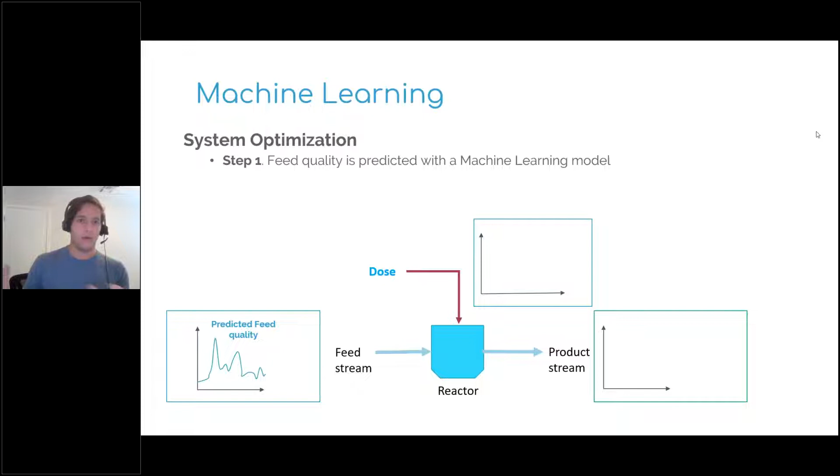So the first step of the process is training models to generate good demand models or water quality models. From there, we can recommend control actions for pumps, distributions, recycle rates, blowers, compressors, even something such as odor control within a system based on what's required on specific inputs.

We do this by looking at historical data and saying, okay, what specific set points resulted on a very particular product stream, whether that be an output in a discharge or drinking water.

Based off very specific rules, such as compliance limits or specific operational targets like cost targets, we have several iterations at work, sometimes tiered statistical analysis or sometimes numerical models such as our hydraulic calculations, creating thousands of iterations to determine what different types of approaches can we take to result in a very specific product stream to meet the predicted demand.

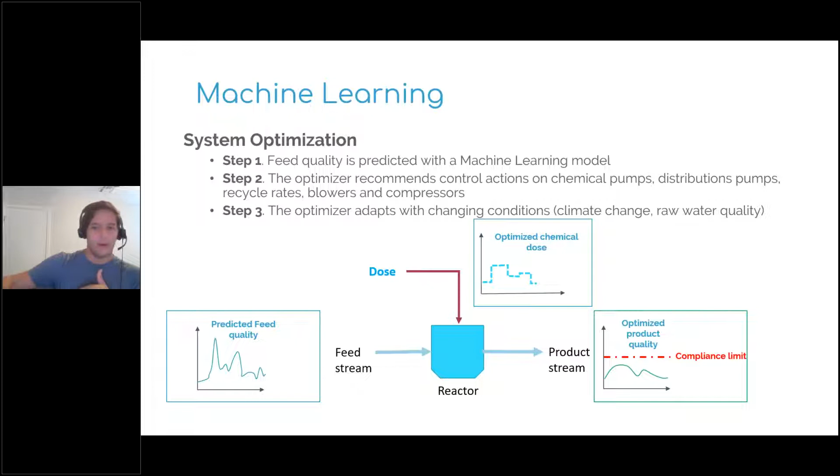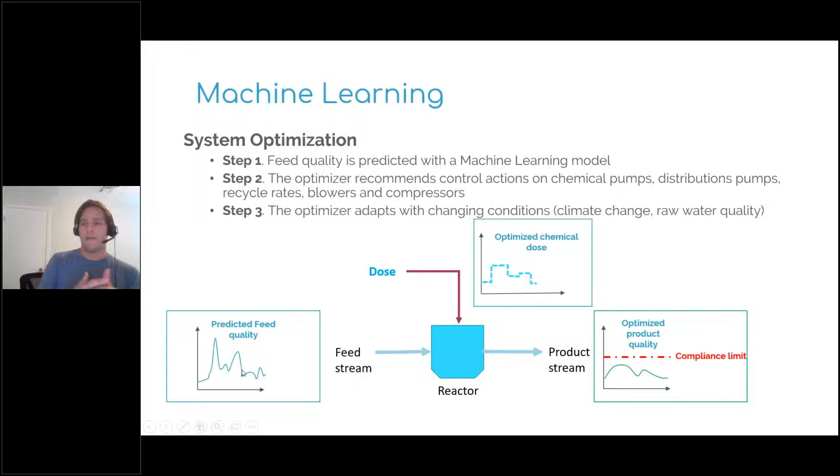Based on those iterations, we can output very specific control actions for a system. We can do it on a 24-hour scale, a 1-hour scale, or react to something that's going to happen in 4 hours. It really depends on what you're looking to predict and how far you're forecasting your data out.

So getting right into some of the places where all this technology is applicable. I'd like to stop here after each one of these to see where we can get more questions answered. So Tim, you'll have to interrupt me right after I finish here on water treatment, which is where I'm going to start.

You don't want to do a question first here? Oh yeah, if there's a question, definitely. I'm popping on because there's a question from David: before you get into the use cases, what threats and issues does using AI present for cybersecurity?

Well, that's a very good question. It really depends, but network architecture is really going to be the prevailing science behind determining the threats that AI brings to this. At the end of the day, AI can only do what you tell it to do. It's not going to go beyond bounds or limits because the models are constrained by things like compliance limits.

It's not going to, let's say, overdose on a chemical if you already have a max chemical limit that it will ever give. So in that regard, AI isn't the threat. In data security, there's always that threat. There's no system that's perfect.

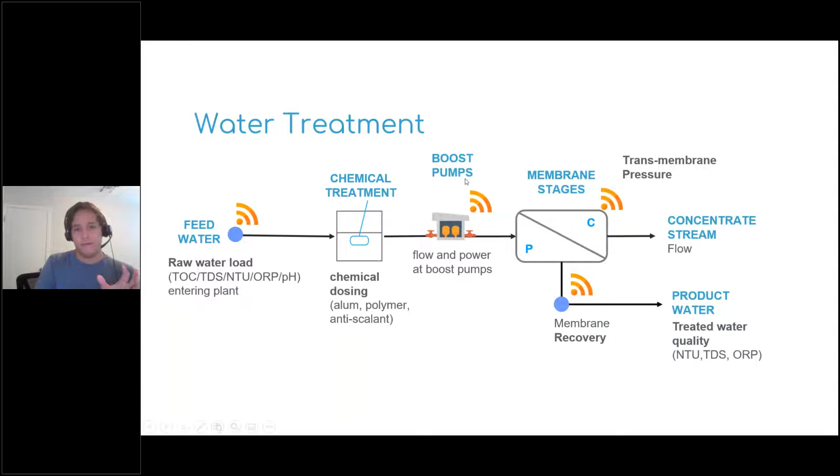In particular, for this kind of - actually I'm just going to go ahead and use this. Come over here. So one of our traditional approaches with one of our customers over on the East Coast was to forecast, as I mentioned, and I'm going to reference back that strategy we use to forecast out water quality. We're going to look at data quality, not just those real-time data sensors at 15-minute resolutions, but also the lab data.

That's very important because, as many of us may be aware, there is a lot of noise in sensors, or sometimes sensors can't be as reliable as we'd wish them to be. Other times our staff gets very stretched thin. I haven't worked in a utility in about 2 years, but still, staff can be spread thin, which can cause a sensor to require calibration and maybe slip through the cracks, and that sensor doesn't become that reliable. So it's very important that in the process of reviewing all this data at 15-minute resolution, we're also comparing it against the lab data.

What we do there, and what we allow these machine models to do, is we allow them to understand how they're correlated, the margin of error between the two, and also validate each other's data. So if a sensor is going off the rails maybe, and you don't have good sensor health, and someone in the lab comes back and adds that lab sample data, validating that data source, you can get that alarm or alert that says, hey, this is off. In the meantime, since this sensor may not be calibrated correctly, it can infer the right water quality parameter to forecast out what you'd expect to see within a very specific day.

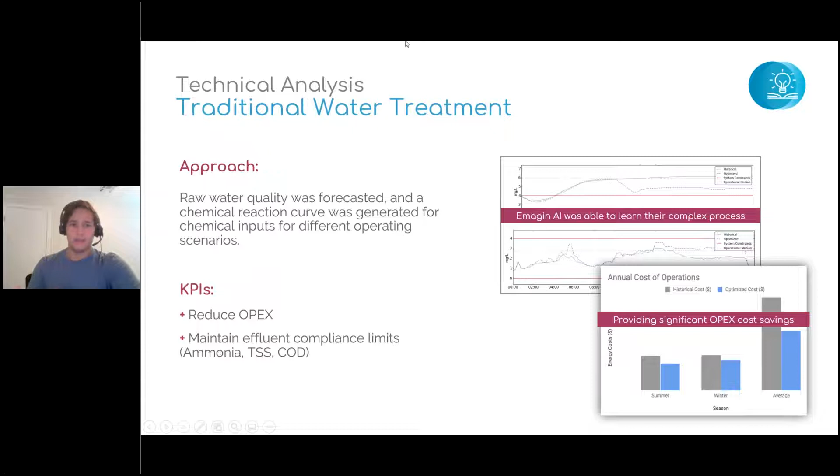In that particular case, it started recommending control actions to reduce specific dosing, eliminate the need for too much lime addition, and of course ferric and polymers. This is just an example of some of the reports spit out by Emagin, which is our artificial intelligence that sits within the platform, and some of the savings realized in utilizing this outcome-based approach or this OPM approach. So this kind of just goes back into repeating a little bit of what I just mentioned.

We actively monitor the status of that raw water quality, because that's the most important part of building these machine learning models—understanding what cluster, what operating scenario we lie in. Once the machine understands, hey, this is the operating scenario I've been in the past, and this is the numerical relationships associated with today's approach, we can then track those key metrics, those outcomes, which are normally put in place by a planning engineer or a process engineer.

And allow the system to use a machine learning model that's both penalizing for any out-of-compliance recommendation and giving rewards for all the specific KPIs listed. So this is a reward-penalization model where for every dollar saved, if a KPI or an outcome or objective is listed as 'save me money' and you have a fixed rate—like water loss, don't lose, save me as much money as possible—the system is going to look for that reward, and it's going to get a reward for every dollar that it's saving.

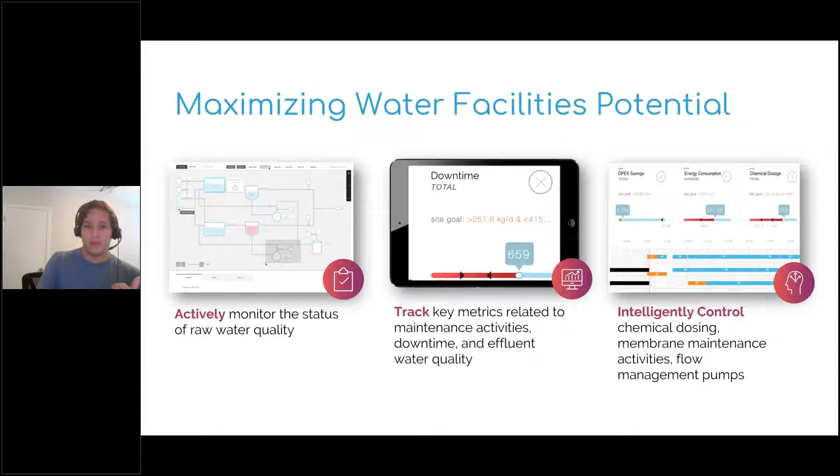Very, very useful. I'm going to stop right there. Are there any questions right now, Tim?

Yeah, a couple came in. One: how are AI models different from just a traditional SCADA system, would you say? Kind of what you're describing here with Emagin—how's that different from SCADA?

Yeah, so the SCADA system is a system of alerts and it's just a display module, right? AI is solving for a problem. And I'm using the term AI, but really at the end of the day, it's a type of artificial intelligence—a machine learning model.

With SCADA, you analyze, right? Or your operators analyze. You go to your control room, you take a look at what's going on the screens, and then based off what you see, you pick a control action.

ML does all of that on your behalf, but also solves and iterates various solutions by simulating different processes before recommending an action, right? So it's similar to having an operator say, 'Hey, it looks like we have high turbidity, let's adjust our dosing over here, let's increase our ferric dosing.' They go and increase the ferric dosing and they wait for it and they look at the outcome and they keep adjusting until it gives them the results. The big difference with machine learning models is it goes through those iterations for you on your behalf—it simulates that on your behalf and gives you an answer straight up.

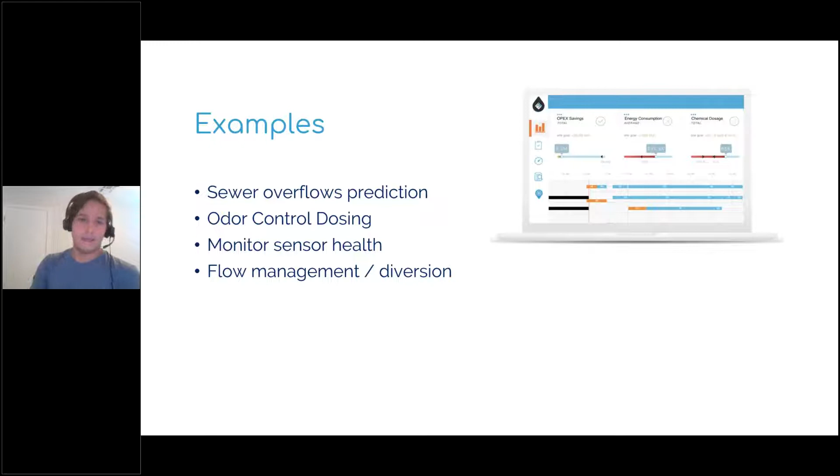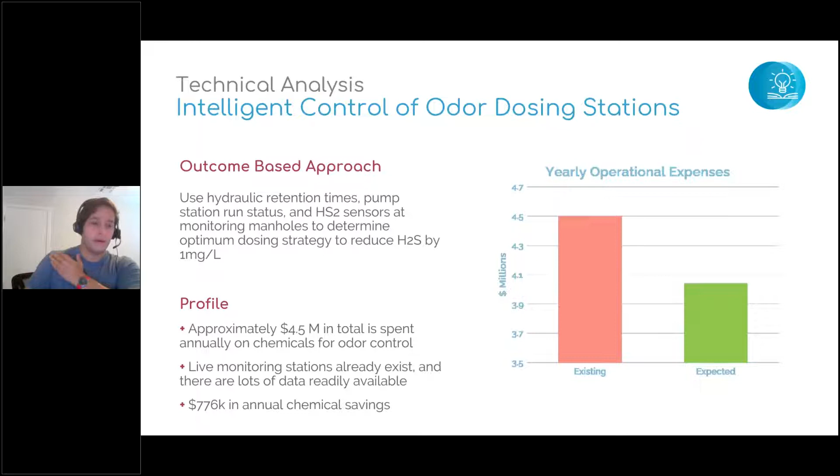Coming back to that H2S example, the total spent for a year just on odor control was $4.5 million along several trunk lines in the large metroplex area. The data was all there to be able to reduce costs. We simulated the costs and historical models reduced by 1 milligram per liter, and we're in the process of implementing that now. We expect up to $776,000 in savings by allowing the system to simulate and work through those issues.

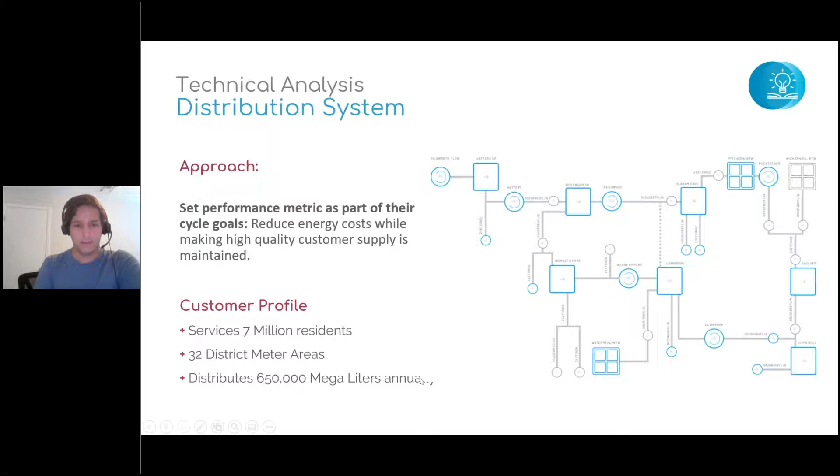Now distribution — for those who may have missed our last water talks a week or two ago, this is a brief sample of how that data and these machine learning models were used at this utility: 7 million residents, 32 district meter areas, roughly equivalent to a pressure zone but not always — a DMA doesn't necessarily have different pressures, just isolated areas — distributing 650,000 megaliters annually.

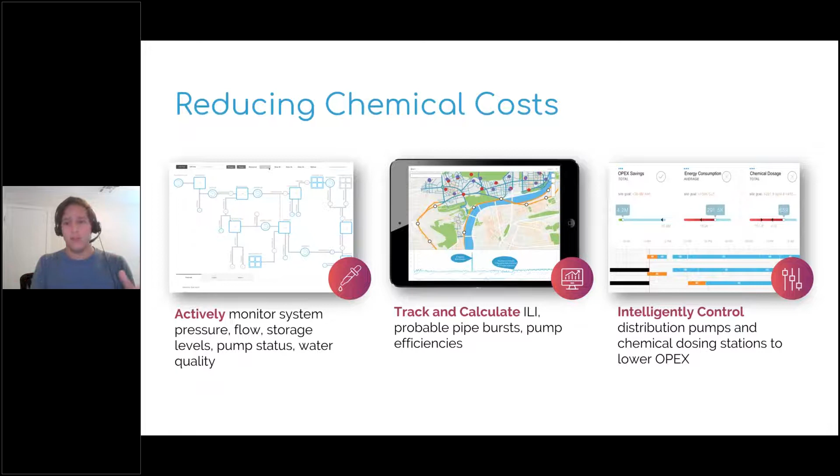Again, we follow that process: monitor all the live data, validate it using historical data, and sometimes not just historical data but the hydraulic model itself. If you don't have those DMAs available, you might be stuck needing to generate a virtual DMA — a virtual segment of your model — to give the machine knowledge of where the boundaries end within a specific system.

With this particular client, same system, same operational scenario, we push out recommendations on the optimum level for a storage tank, elevated or ground, what time of day the high service pumps should operate to keep those levels steady, and how that compares to our tariff rate or energy rate structure — optimizing pump timing and maximizing storage in the system to save money and energy overall.

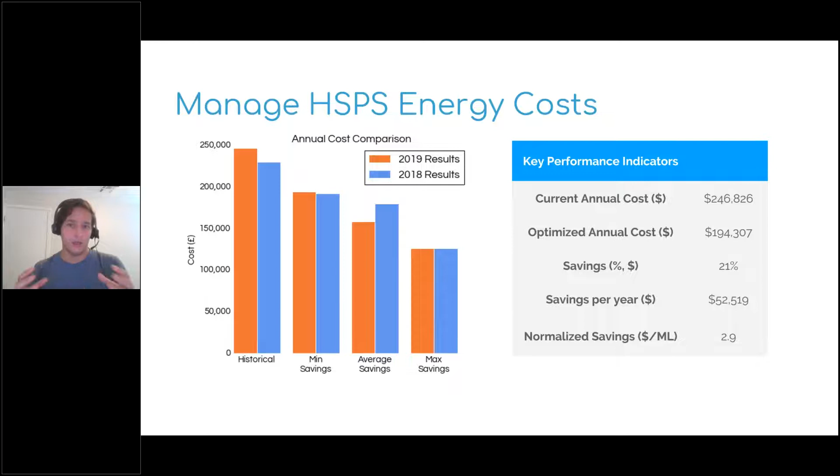Wastewater treatment, and then I'll stop. So in this particular case, we have a wastewater treatment plant, very similar concept, 17.6 MGD, right?

4 parallel treatment trains. In systems where we have trains, we have an even easier time validating some of those model results. We can isolate a model or a recommendation to a very specific train and use the data from that process to feed other trains. It's the same way we can use data from all the implementations to help these models further understand the numerical or biological relationships being experienced in different types of processes.

Conventional activated sludge treatment is a pretty well-known science, at least that process. But as our limits get stricter, a lot of people are starting to look to more advanced or BNR systems, enhanced nutrient removal systems, whether that's shifting over to a modified Bardenpho or MLE process—all of that alluding to segmenting your reactors such that only portions get oxygen, so you can have anoxic zones available to get biological phosphorus removal or anything of the sort.

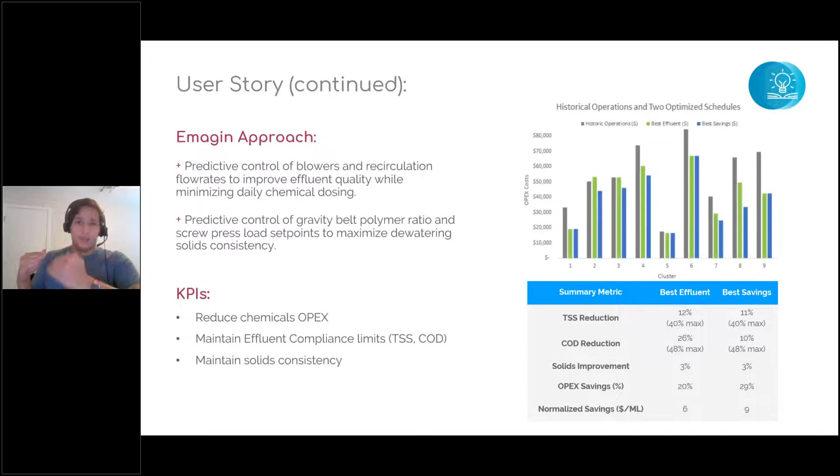Just roughly speaking, for every Q that you put into a wastewater treatment plant, most of the time in a conventional system, you're recycling—pumping back to the head of your plant 4Q, 4 times the amount of water, just to keep your biologics steady.

But in this particular approach, we prescribed two different outcomes to see what we could get. We said, okay model, I want you to simulate and generate the best effluent while maintaining a certain level of cost savings. And then as a side project, we also asked it, okay, here are the permit limits, all you've got to do is maintain the permit—give me an operating scenario for that.

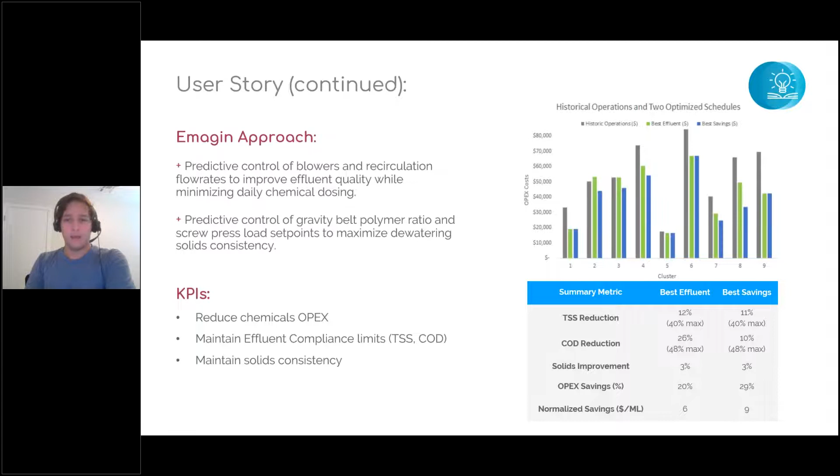As you can see here at the bottom, these were kind of the results: where we can get higher COD reduction, TSS reduction, and still achieve operational savings across a system. But we could also maintain and reduce costs even more by working within that margin—the safety factor, the design safety factor of a plant. It was a very, very interesting way to approach that problem. And I'm going to stop right there.

Anything before I keep moving, Tim?

Yeah, I had a couple of questions come in, and I think they relate to a question asked later. Basically everybody asked, what happens if a sensor is unhealthy—how does that affect the entire machine learning model? It's similar to that: what happens if you introduce a new treatment process into that model? How does that mess up everything that's been learned up to that point? But I think that's summarized in how you can correct for or adjust for those changes to your treatment, by this question that asks how long the model training period is.

Right, so maybe start with that one. If you start with how long is the model training period, I think that kind of helps to answer those other questions about different disturbances that might happen.

Of course, every company is going to be a little bit different, but at least with us, we do go through an implementation period whenever we hand off or sell Emagin. That implementation period can range anywhere from 60 days to maybe 120 days, depending on how many models are built within that. But what comes out of that is a pretty detailed exploration report, data correlation analysis, and a trained model that's already solving around a desired outcome. So that's usually around how long it takes to train those models and get everything set up.

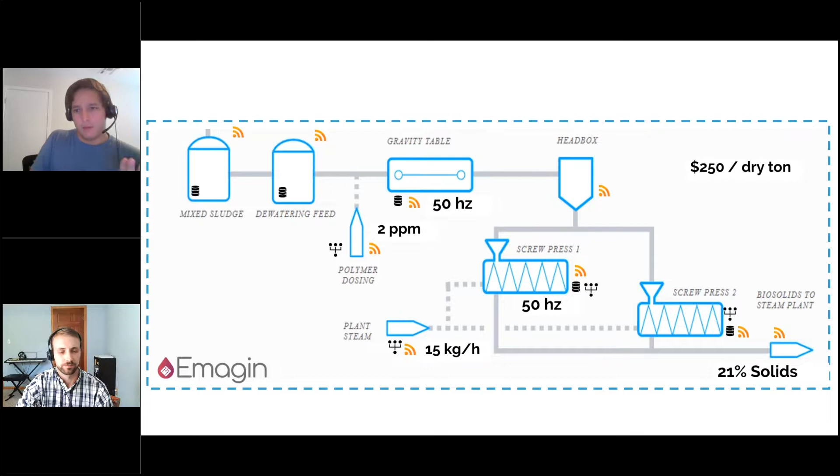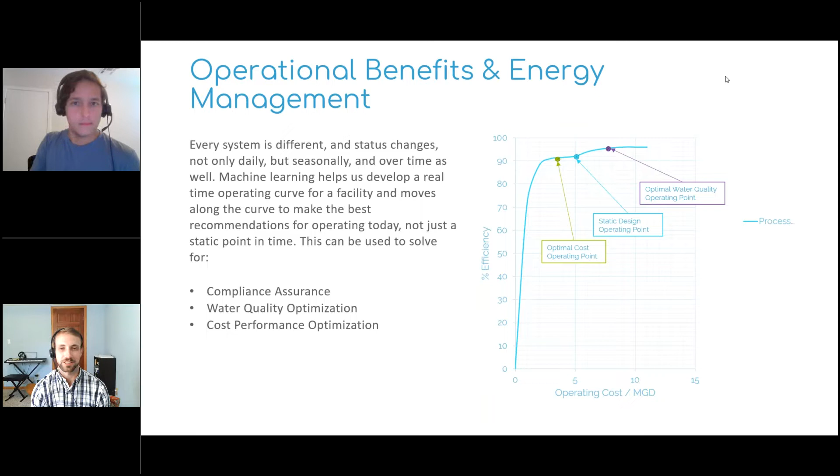You'll be hearing from us, but I think this is a good summary question for us to wrap up on with a couple minutes remaining. Javi, what's the next step to have, again this buzzword is used all the time, a digital twin? What's the next step for doing that? This concept is often subject to interpretation. Is this it? Is this the digital twin, or is this just part of it? Is this the next step? What do you think on that?

This is part of it. Using a machine learning or the OPM, the operational performance management approach, that strategy, I'd say it's a perfect first step, because you pose a problem, right? Or how do I do this? Or a question, you ask a question. And only by asking that question to the model can you understand where your gaps are, right? The digital twin is the actual digital representation of your system, which you may have in some regard.

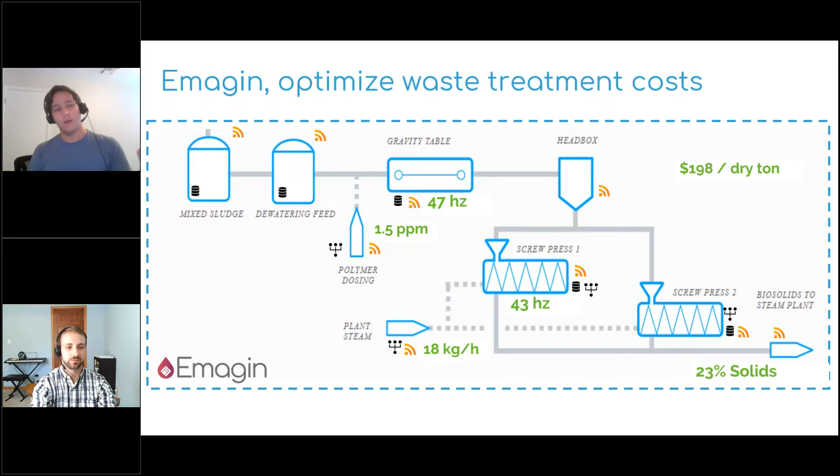If you use one of our core products, you already have a digital twin. Now, is it up to date? We don't know. We don't know until we know. But applying those machine learning models and analysis lets you know what you're missing, right? What are you missing before you can start asking more complex questions?

And some of those questions are, hey, can we get an equipment control schedule for our entire system for the next 24 hours, right? Predictive maintenance schedules, maybe quantify potential non-revenue water based on ILI, which is what our Info360 product does. Analyze system capacity, levels of service, which is very important, especially in wastewater.

Before we get to that stage, we need to collect the data and understand what is missing. The more granular that data set, the higher the resolution. By that I mean, if you have an actual live sensor out there collecting data every 15, 30 minutes, the better your results. If you have lab data or maybe a CIP program generated in tables by consultants or anything like that, that is data too. Now, the resolution of that data may be 1 year, 5 years, or anything of that sort, but that's data too that can be used in these models.

With, of course, the granularity of that data determining the outcome and the efficiency that you get from it. I would say the first step is to do some sort of database analysis, right? Understand where your organization is storing your data. If it's in 1,000 different places, how do you get it into one place? Innovyze offers Info360 as that solution to start getting all that stuff into one place. That's step one. Step two is understanding what data is missing in order to achieve very specific goals. We also offer services that provide guidance on how to get to these stages.

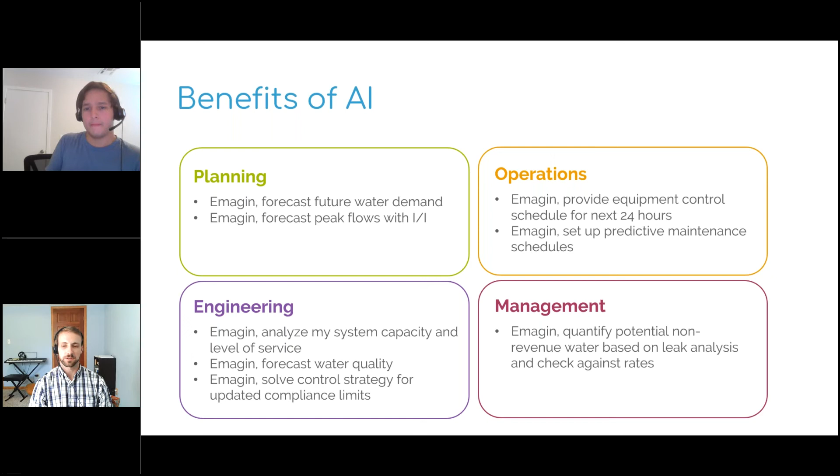I think it's good to understand Info360 is a platform. There are lots of different tools and modules that can go into it. And Emagin specifically is focused on the machine learning and AI, it's a component of Info360. So there are a lot of different product names here at Innovyze. We know it's confusing, but Info360 is the product, Emagin machine learning AI is a specific component of Info360, and Info360 can do a lot of things and will be doing more in the future as we continue to build it out.